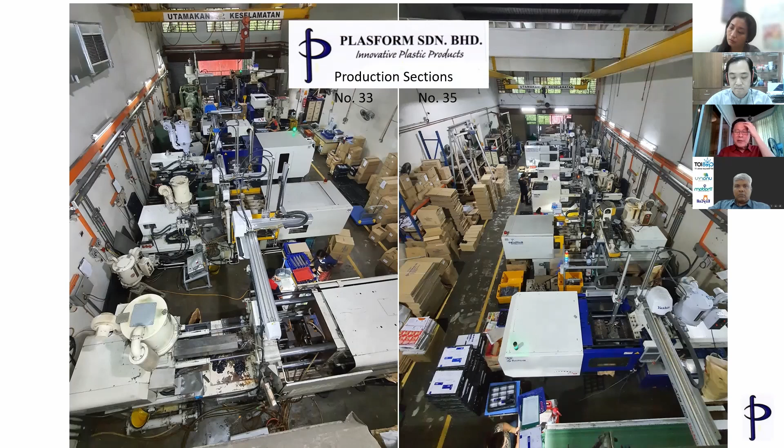Talking about I 4.0, everybody wants to talk about I 4.0. The government is pushing I 4.0 like mad. But what is really I 4.0? They come up with these 9 elements. If you try to do all 9 elements, you're bound to fail because it's too onerous. So at Plasform, what we decided to do is tackle some of the elements, start small, but tackle some of them.

Robotics, I think we've gone into robotics since 1987, the second year we started. We bought simple pick and place robots, pneumatic driven and so on, but that's gone into more sophisticated robots, fully programmable servo Cartesian robots, and now we have bought some cobots, which are collaborative robots.

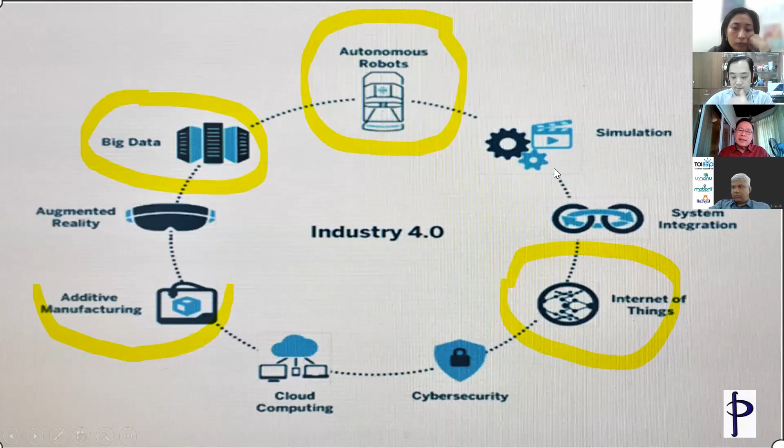Simulation, we've done a bit of that, but very seldom. I think when customers demand a perfect product, so we do a bit of mold flow. In fact, I was a mold flow guinea pig back in 1979 in Australia. We went to the founder's house to do all the programming and so on. So that's another story for another day.

System integration, yes, you want to integrate, but try to do the basic things first, I think. So the Internet of Things, we are doing that. All our machines now are connected to Wi-Fi and so on, so they can transmit data to a central processor, so I'll show you a bit of that later.

Cybersecurity, not so important for a little company like us. If you want to hack lah, what the heck. Cloud computing, I think sometimes is overemphasized. You don't have to always have cloud computing. If you are traveling between 11 countries, always on the move, you might still want to see what's going on in your plant, so you might want to use cloud computing. But if you're just stationed in 1 or 2 venues, I think your own internal server would be more than adequate.

Additive manufacturing, we dabble into that. If a client wants to see a physical part in his hand, we go and get a 3D printer to print it, not on our own, but outside people. Augmented reality, I think that's some years away for Plasform, I don't think it is a necessity. Big data, yes, we are collecting data, being able to collect data and analyze it and so on. You'll see an example of this later.

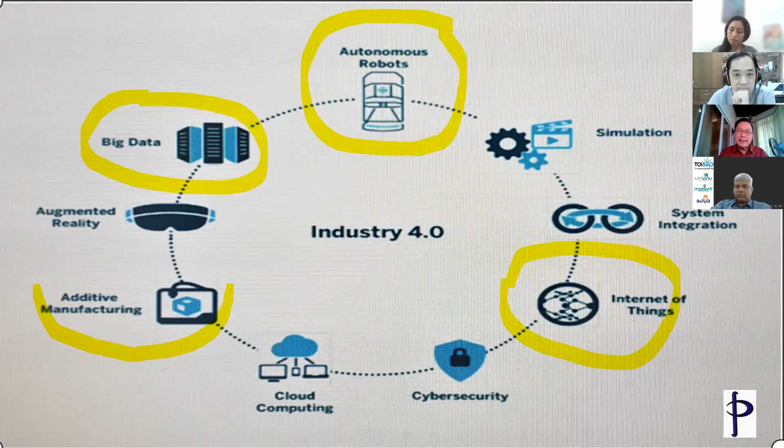So the most important thing, I think, before you start to do all these things, is think about why you want to do it. What triggered Plasform to do some process improvement, to automate and to start I 4.0. I got 10 reasons for that, and this might be common to most of you also. Difficulty in getting foreign workers and local workers also. Local workers are even harder now because of Grab lah, FoodPanda and so on.

Difficulty in scheduling and delivery due to absenteeism among local workers. You want to schedule 3 machines to run for 1 client, and 3, 4 operators don't turn up that day, habis, you have to postpone your schedule. Inconsistencies in the manual process. If you cut a gate or trim a part using an operator, in the morning shift it's okay, but in the afternoon or night shift, then you've got problems. Things like that. Rejects caused by handling in the manual process.

The more you handle a part, the more rejects you create. Especially some of our parts are mirror finish, so if you scratch it, one tiny scratch, the whole batch gets rejected, and sorting 20,000 pieces is very, very painful.

To reduce WIP, if you automate it and make a complete production cell out of it, then you have less WIP.

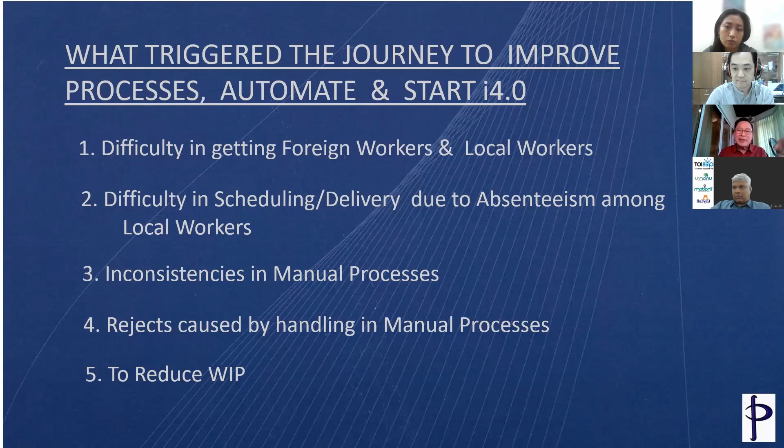Wages rising fast, not too long to go. I think we will definitely hit minimum wage of 1,500. At the moment it's 1,200. You see, when it's 600 ringgit minimum wage, there's no incentive to automate, right? You can employ 10 workers and it's only 6,000 a month.

Reduce boredom of operators. Yeah, I think if the guy has to sit at the machine for 60 seconds to wait for the next part to come, he will get bored, she will get bored. So to retain workers better, you better automate, reduce the boredom in the plant.

Increase productivity, of course, by downsizing the workforce. If you use automation, then robots don't get moody, they don't get sick. They do need maintenance, but that's far and few in between. The uncles don't pass away, the aunties don't get sick, the babies don't get sick, they don't need sick leave, annual leave and all that. They just work 7 days a week, most of them.

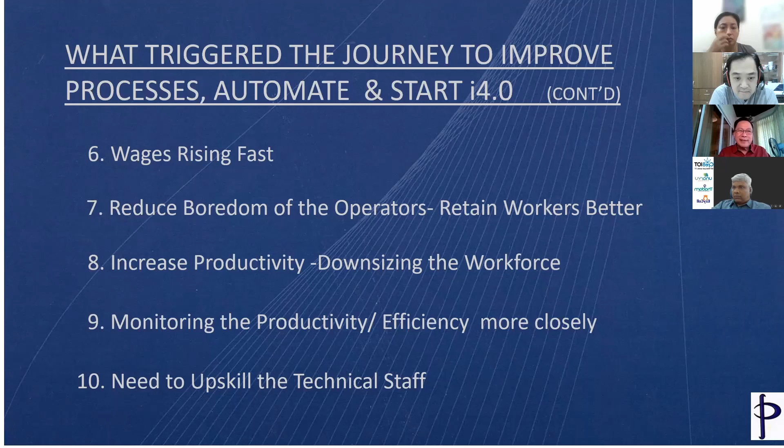Then the other thing is the need to upskill the technical staff. I think with introduction of new technology, you really need to upskill your staff. And the only way to do it is to get all this new technology into your plant. Otherwise, you talk about theory, go to seminar and all that, it just won't work for you, is it?

But before you start on all these things, I think one of the basic things you must start with is lean thinking. You heard about lean from 25, 30 years ago, 40 years ago, the Japanese started this, and then the Western people also pushed this very hard. But sad to say, a lot of Malaysian factories are still not thinking lean enough. What is lean?

Lean is a set of concepts, principles, and tools used to create and deliver the most value from your customer's perspective, while consuming less resources and fully utilizing the knowledge and skills and the equipment. So fully utilizing the knowledge and skills of your people and the equipment that you have. I think I should add that in.

Things to consider before you embark on all this I4.0 stuff and in adopting all this expensive technology. Number one is financial requirement. Do you have the financial resources? And if not, if you need to borrow, can you borrow? How much can you borrow? Do you go and buy 10 automatic pieces of equipment at one time, or do you start with maybe 2?

If 10 is very nice, you have the whole factory set up all automated, but then financially it might kill you, because the repayment per month is 45,000 a month. Then for a small SME like Plasform, we certainly cannot afford that. So we start small. Instead of fitting 10, what do you call it, the cobots, all in the factory to do everything automatically, we buy 1 first, and then 2, and then more.

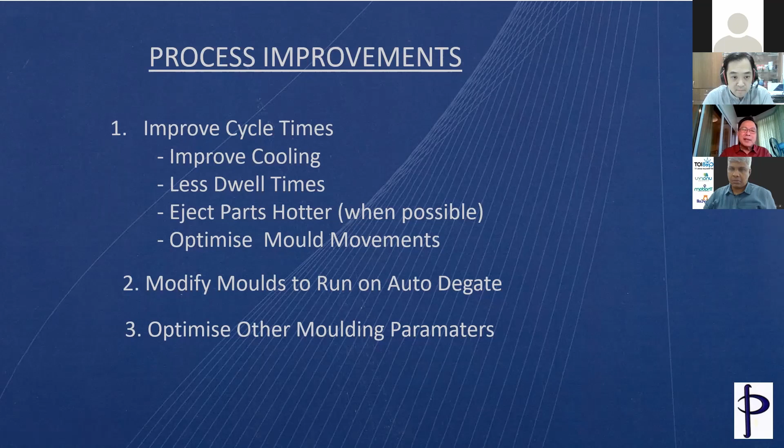Modify your molds to run on auto degate, and I shall show you an example of that. Optimize other molding parameters, like even decrease the temperature of the melt, that will save you some cycle time improvement. Okay, this is an example where we automated the degating.

This mold is, I don't know, 18 years old. When it was new, we kind of thought, okay lah, the minimum wage was about 600 at the time, 550, so you put an operator to cut it. As the production volume increased, we said you cannot afford to waste the operator just cutting gates like that.

So what we did was we changed it to what we call an elephant gate, a banana gate, a bullhorn gate, depending on which school you come from. Those are the 3 names for this type of gate. It's like a sub gate, but with a particular shape like a bullhorn.

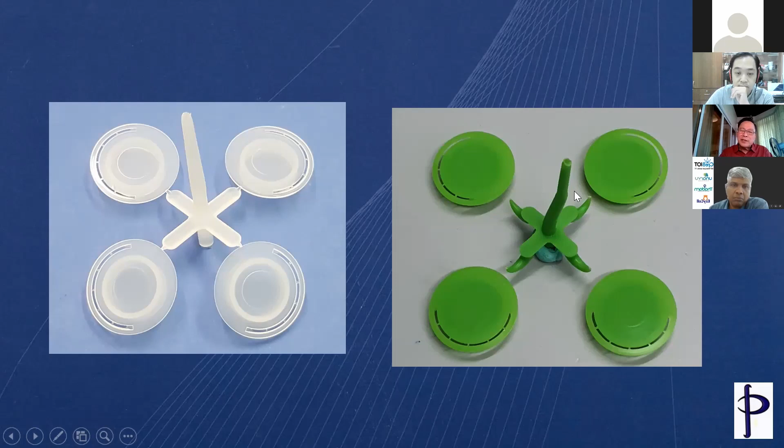So now the part can eject with the gate already severed, cut. All you've got to do is pick up the runner with the robot, and throw it into the crusher to do your online crushing. That way you save an operator spending the whole day pulling all these gates apart. So that's process improvement, automating the gate.

This one is a picture on how to reduce cycle time. To do this you have to buy a very expensive thermal imager - this is an infrared thermal imager. It can actually take a shot of the molding as it comes out of the machine, and it will tell you exactly what the highest temperature is.

If you look at this, it says the highest temperature at this point is 74.92 degrees. I don't know whether the second decimal is required, but never mind. So the sprue is not the hottest part - this part of the molding is the hottest part, believe it or not. And the mold temperature here is 32 degrees.

This was running a 65-second cycle, cooling time 45 seconds. My operator, my supervisor touched the part and said, 'Wow boss, still very hot.' But I said, okay, still very hot - but it's not distorting, right? It's to tolerance, right? Everything is dimensionally okay, appearance okay. Yeah, still okay. So I said, I will challenge you.

I said, eject it a lot hotter. He said, how? Cut the cooling time. Why? How? Then the part will distort. I said, you do it first, then you see.

So we actually finally brought down the cooling time to 31 seconds. The cycle from 65 became 51.45. Again, don't know how we get the 0.45.

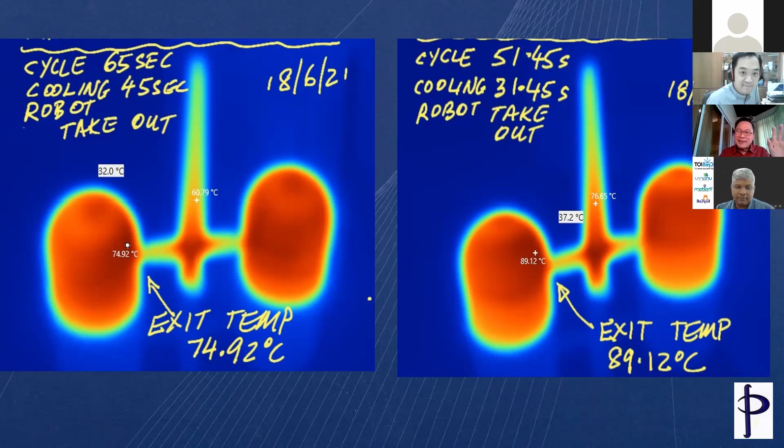But you have to invest in this technology. 18,000 ringgit for the thermal imager is a lot of money for a small SME. But we say that if we do it for every job in the plant, your payback will be 6 months or less. So we invested in that about 2 years ago.

Modes of automation using equipment. You can go to automation at the next stage of productivity improvement. What can you use? Things like synchronized conveyors. I'll show you a picture and then explain how synchronized conveyors can help you.

Programmable Cartesian servo robots - in the old days we used to use pneumatic robots, everything pneumatic driven, chung chung chung. It can only go A, B, C, D, E, that's it. But with a Cartesian robot that is servo controlled or programmable, you can go A, B, C, D, E, F, G, H, I, J. The newer they are, the better they are.

Even the Chinese robots are coming out with tremendous products that are actually as good as the Japanese ones functionally, or even better, but at about half the price. I'm not saying they are better, but if you want to start a bit cheaper, don't go and buy the most expensive unless you are very confident. I mean, I've got a Japanese robot.

If I tell you the name is Yushin, they will last 22 years. The Chinese robot, I don't know how long they last, but I bought 4 or 5 of them now. It's nearly half the price, so let's start with that - don't go to the most expensive.

Then there are programmable 6-axis robots or cobots - these are amazing things, you can do a lot with them. You can program paths A, B, C, D, E, F, G, H, I, J, K, L, M, N, O, P, Q - you can program it almost infinitely. And the path they move can be a curve, an ellipse, all sorts of paths, whereas your Cartesian robot is a bit more limited.

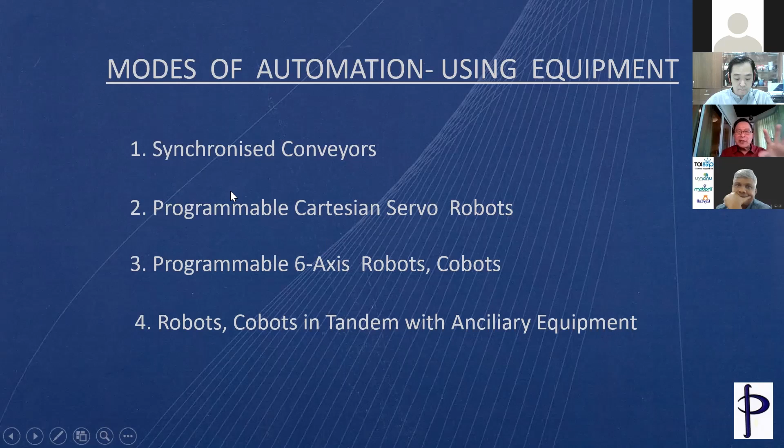This is a synchronized conveyor. Instead of having a conveyor running continuously, bringing parts to the operator who cuts the gate or packs, you can synchronize the conveyor to line up maybe 10 to 15 parts, depending on size, along the conveyor. Why is that good? Because you can have 3 conveyors in the same configuration lining up parts, and it takes maybe 5 minutes for the conveyor to get from that point to the operator's table.

Your process only takes maybe 30 seconds, so your operator can come back every 5 minutes to clear the conveyor, go to the next machine, clear that one, and come back. Now you're using an operator to look after 2 or 3 machines instead of just 1, and the added bonus is your operator doesn't get so bored sitting there waiting 60 seconds.

This is a long cycle part, sitting there 90 seconds, because it's very thick polycarbonate, 3.5mm to 4mm. So the operator is less bored.

Let me put this guy on hold. Sorry, I'm in a webinar, cannot talk. I'm in a webinar. You can call me back an hour later, please. Thanks.

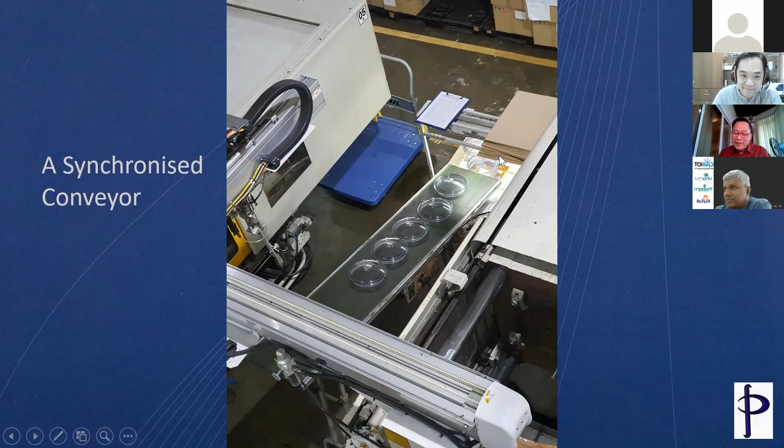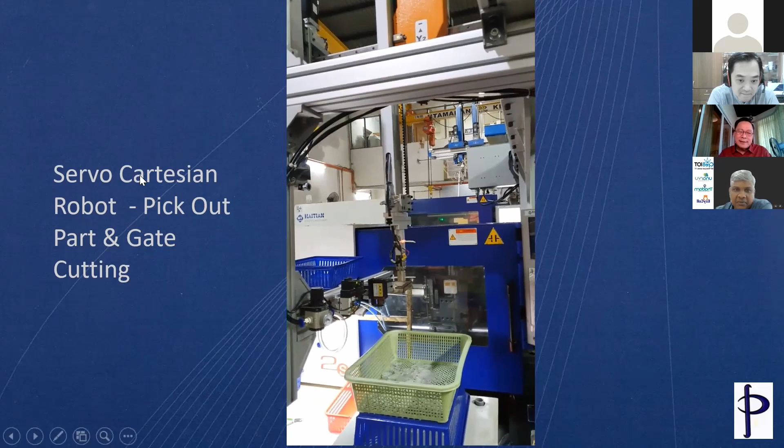This is a Cartesian robot, a servo Cartesian robot, in this case programmable. See what it does? It picks the part, then cuts it and throws away the runner. This is the simplest one. I'm showing you this so we don't wait for the next cycle.

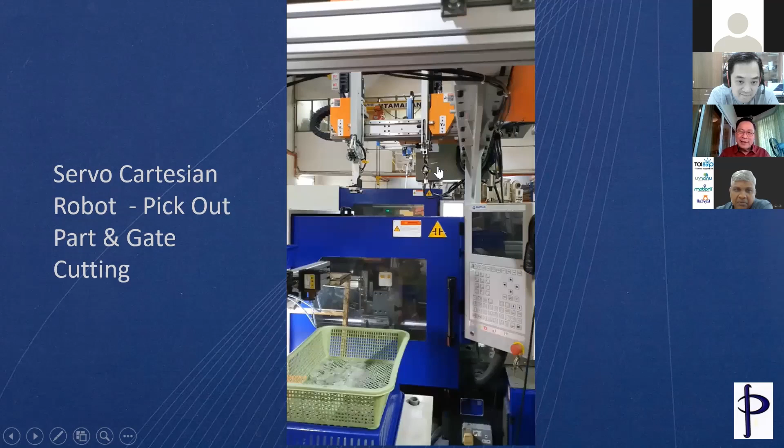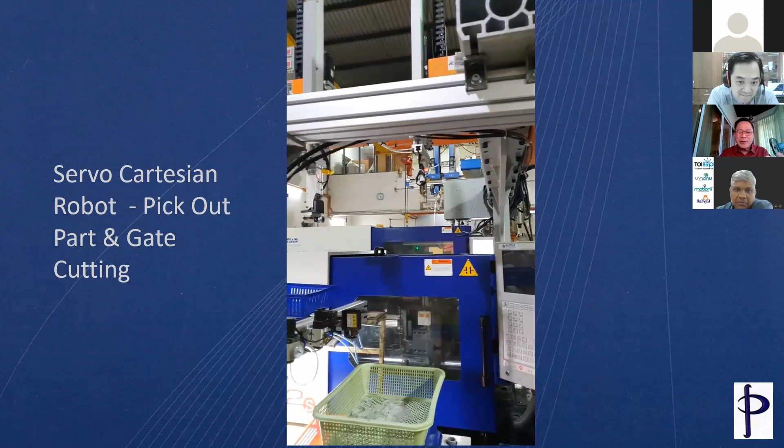Somebody asked me why the robot travels so slow. I say, if it's already out of the mold, it's own time - going in and out must be fast. It's waiting for the mold to close and do all those things. With a long cycle, the robot has plenty of time, so you don't need to wear your robot down. Let it take its time, go slowly.

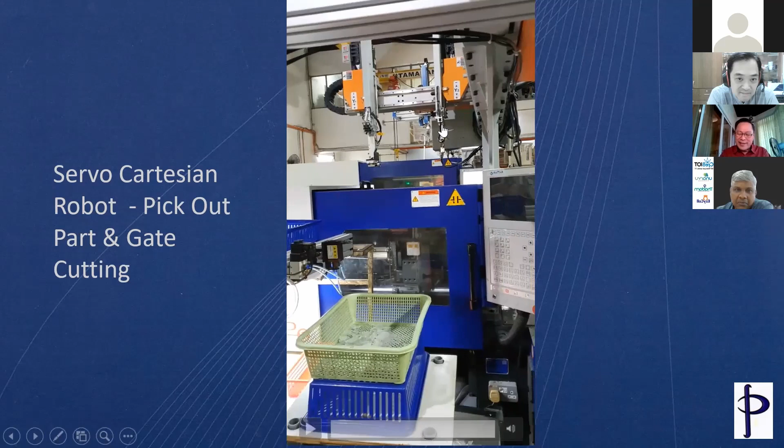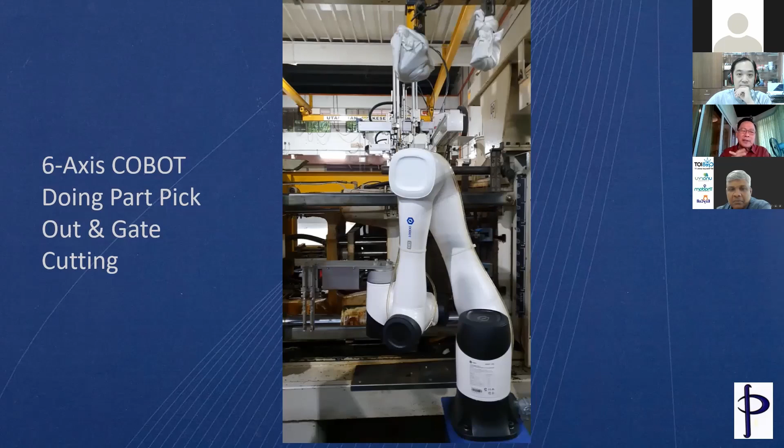It's still waiting. This one is just a simple pick-out gate cutting for one cavity. This one is now the cobot from China, called a Dobot, D-O-B-O-T. Don't know why they call it a Dobot. It is taking out the part.

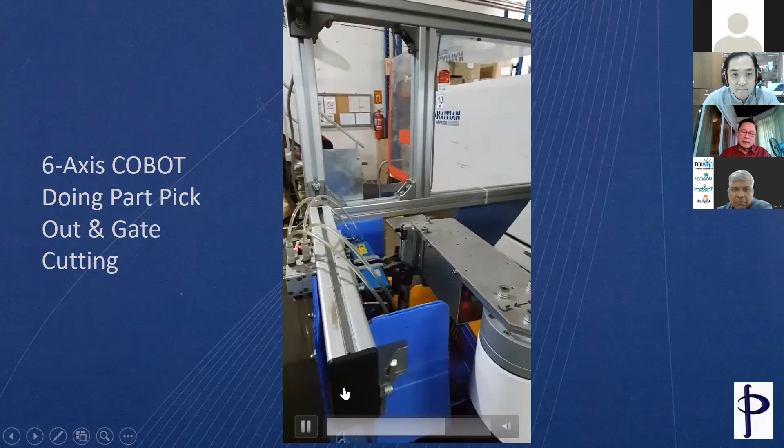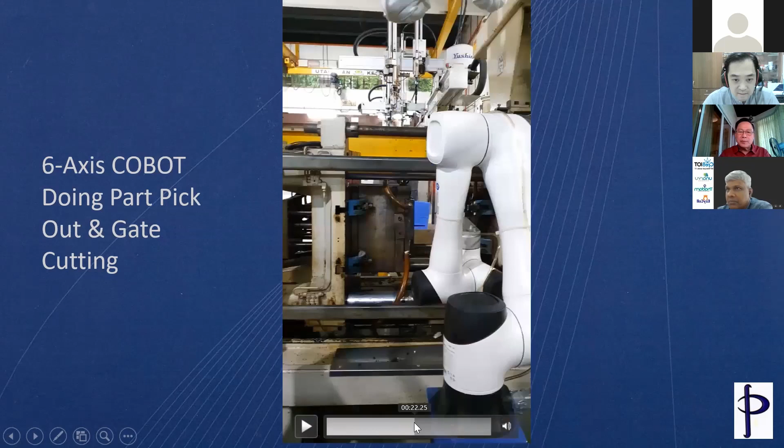That's what it can do. But let me show you something before that. For all this automatic operation, you need to be careful because even though the robot has a sensor and won't hurt anybody, it might still crash into your mold.

So you have to set up some safety. What we have here is a machine that's maybe 15 years old. We're retrofitting it - a mix of brands, Haitian and a China machine. China and China, they can talk to each other, so no wars among them.

So we put a light curtain here, so that if the cobot or dobot is anywhere near the mold inside, the mold will not close. Things like that - you've got to put a bit of safety in it. That's another thing you have to learn, because if you start on this without the safety, you might damage very expensive equipment. This is 80,000 worth of equipment.

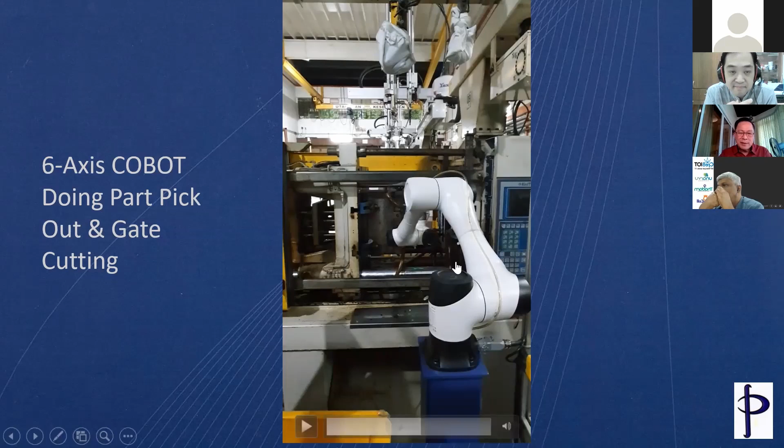So the next one is we are using this - this is a Danish cobot from Universal Robots. This is very, very expensive - 140,000 to set up this fellow with a bit of jigging. But not this one, this one is another, I don't know, 15 to 18,000, I forgot already.

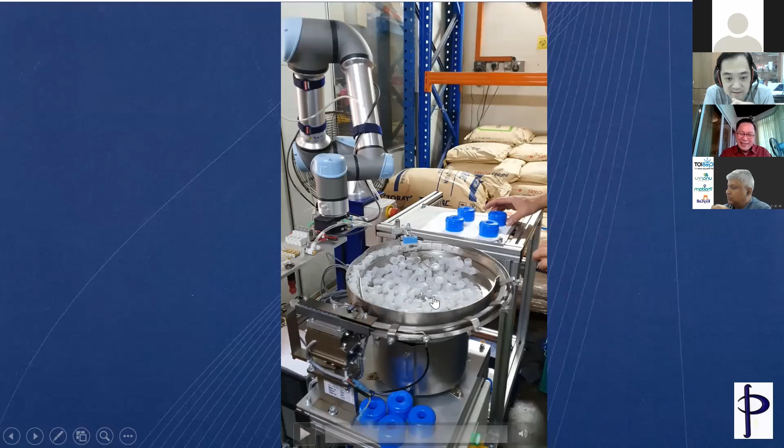So what we are doing is trying to assemble this part, this little part here called a plug, to the big cap here, the blue one. It says the test run.

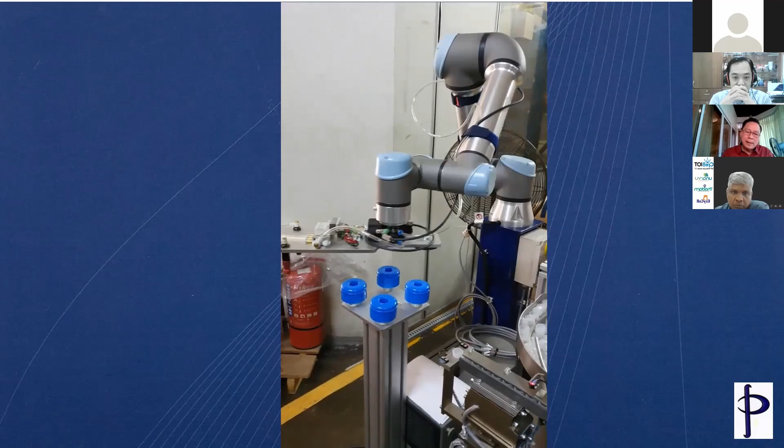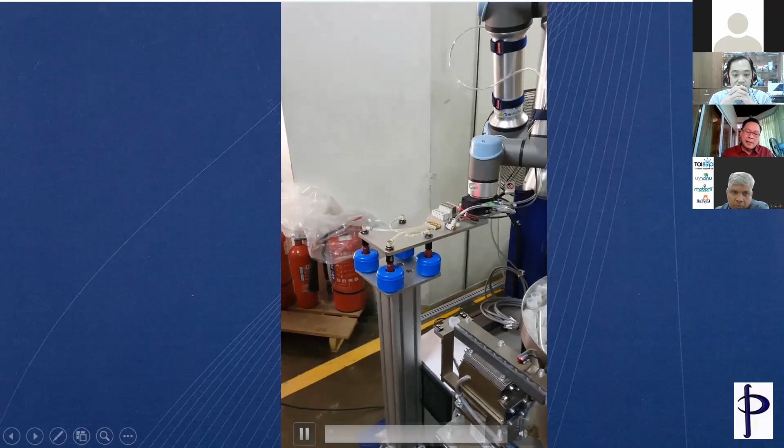So that's what you can do with a cobot, or an industrial robot can also do it. But this one, because our space is limited, like I said, it's open - you don't see a guard around it, so it's safe to work with people around it.

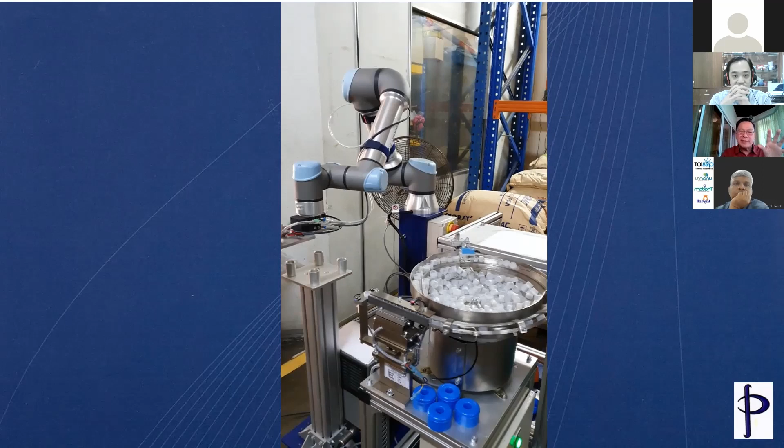Then we found that it can do so many things, so we said why don't we try something new with this - make it into a milling machine and see if it works or not. So this is doing a milling operation.

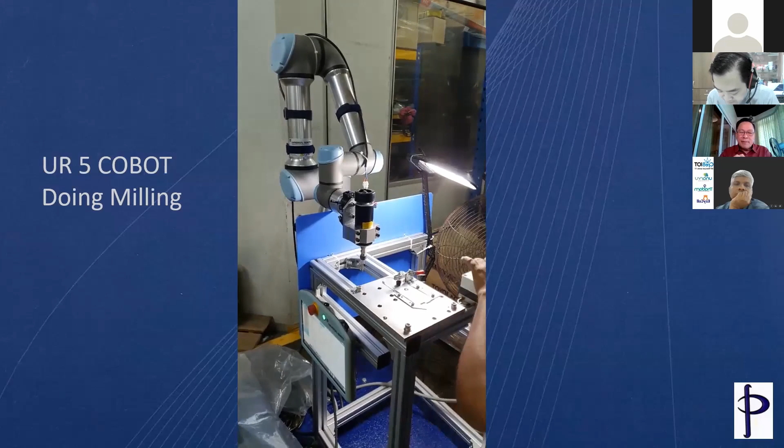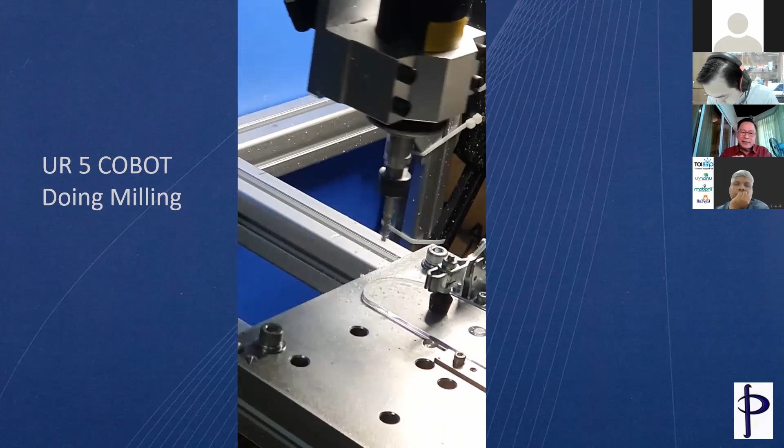Is following a contour track into the original position. And the operator loads up the next one, and it can start again.

The story of this part is that we have a problem with the molding. The molding is about 30 or so microns over the thickness. Why? The technician went and packed the pressure so high that the thickness actually increased by about 30 microns.

So it's 30 microns off spec. We said, wow, we'd throw away 6,000 pieces, and 6,000 pieces is over 9,000 ringgit. So we said, since we've got this cobot, why don't we try to salvage that 9,000 ringgit. So we actually bought a servo motor, a speed control motor, made up a table for it, and so on.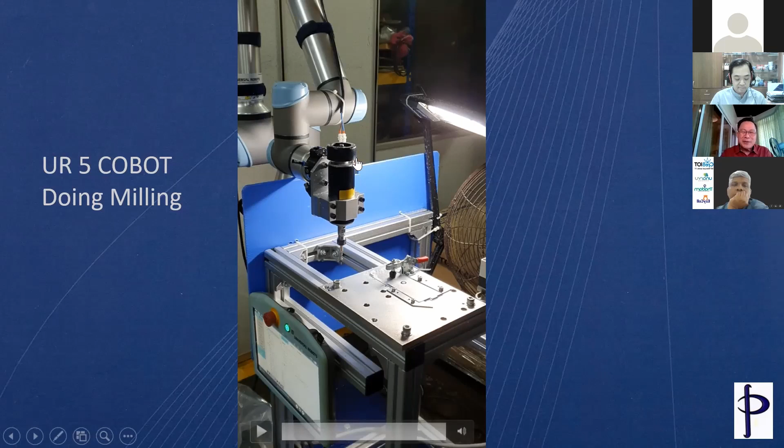So the whole thing costs, including the labor, 2,000 ringgit or less to do all the milling, the setup, and so on. If you do the sums right, 9,500 minus 2,000, you save 7,500 ringgit worth of products. That was quite a good payback for a cheap investment into a speed control motor like this.

So you can do that with sophisticated equipment. In fact, if you really think about it, you can use your imagination to do a lot more with something like a cobot.

This is a vision sensor system we install on the mold to detect parts. After the mold has opened and ejected, it makes sure that all the parts are cleared before we clamp it again.

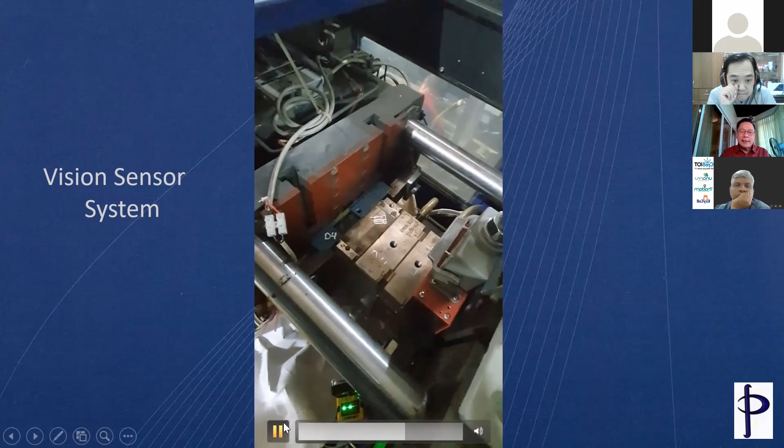Yeah, you saw a flash, right? About there. The only thing you can see is the flash up there. It's now taken a picture and compared it to the master that you set up.

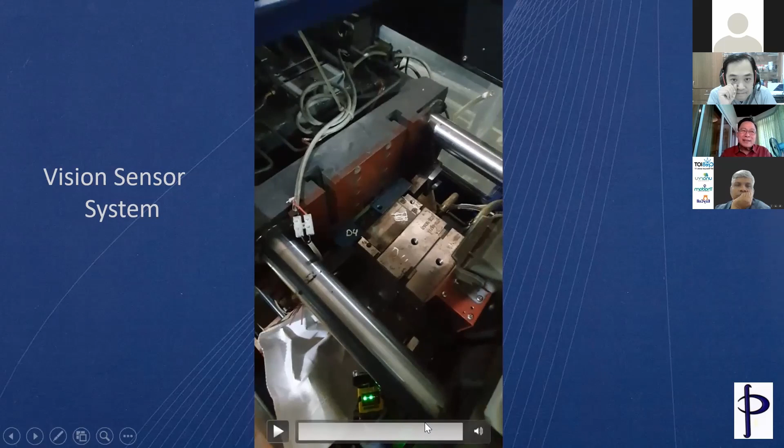When you take a picture of the master, the mold is clean, there's no part stuck in it. Now, this is a typical shot of the Cognex system where this part is put in there on purpose to simulate that there's a part stuck in there.

So the mold doesn't close now because the sensor says, hey, there's a part stuck in there, better not close the mold. This is going to cause double clamping and damage the mold and so on. So if you've got very sensitive molds and very high precision molds, this is the way to go. Otherwise, if you clamp the mold once, it's going to cost you 2,000 ringgit maybe.

Wiley will be able to tell you that some of these high precision molds take a lot of fixing. And not only that, you incur the wrath of the customer and disrupt his production for 2 weeks and so on. He's not going to be very happy.

So if you've got a sensor system like this, it will report to you. It says result here, fail for that particular tool. Fail means the part is stuck in the mold like this, and the detection will prevent any mold damage. So that will save you money and a lot of anxiety and a lot of sleepless nights.

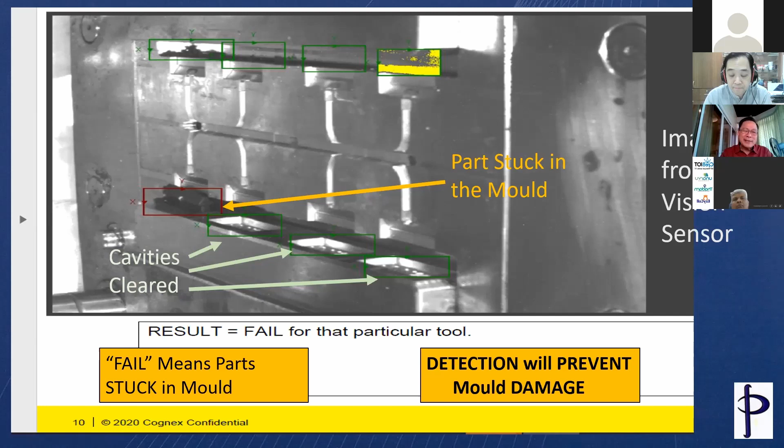So, data collection system: we want to see whether the machine is running or stopped. You want to compare the actual cycle to the costed cycle, calculate efficiency of the run, and show any disruption and stoppages during the run. We can add things like setup time, purging time, startup time, all into the data.

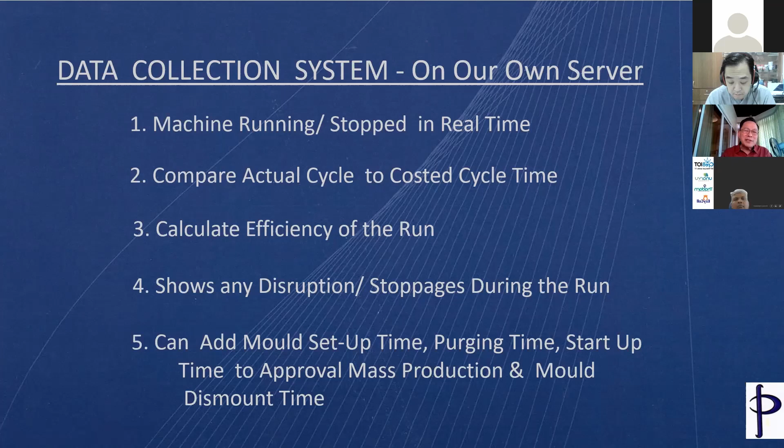So that at the end of the week or the end of the month, you can analyze it and see how your machine is performing, how your shop floor is performing. This is a typical dashboard that we took, around the 11th of this month, earlier on. You can see there's a machine identification here.

You can see in this part, the targeted cycle is 39.5. The actual running cycle is 38.93. So this machine is running at about 102% efficiency. That tells you the day shift has produced so many parts and the night shift has produced so many parts and so on. So if the line is straight on the top there, then there's no interruption. The machine is running fine.

But look at the bottom part, machine 10, cycle is a bit over cycle, but not too bad—about 4% out. No, 0.5, it's about 2% out. So there's some interruption here, as you can see, where the line is down, then there's interruption, the machine has stopped. So you can see during the day, about 2:15 to about 3 o'clock, there's a long interruption here, then it starts again, and then another long interruption.

So you can point this bubble at anywhere along the line, and it tells you exactly when the interruption started. Then with this data, you can go and talk to your supervisor or your technician and say, hey, what happened to the machine at 2:15? There was an interruption.

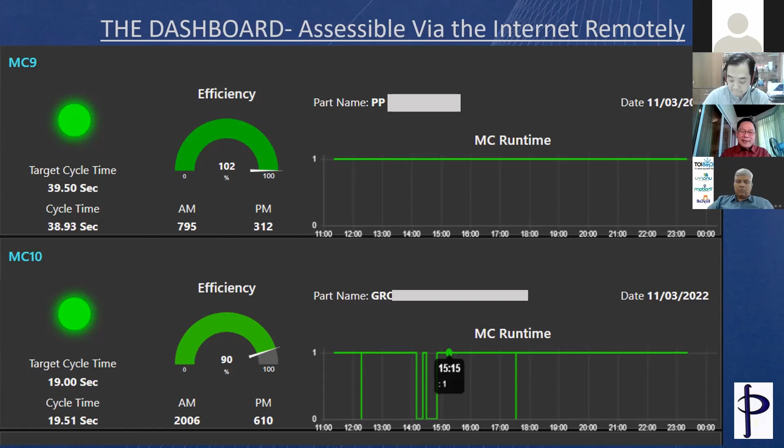Most SMEs run at about 45 to 55% efficiency, if that. World-class companies are approaching about 80, maybe 85%. So we really want to move on to become world-class in Malaysia. This is the reason why we are doing all these things.

I think that's about it. Sorry, I've taken a lot more time than I intended to, but I thought I'll explain a little bit more so that we don't rush through.